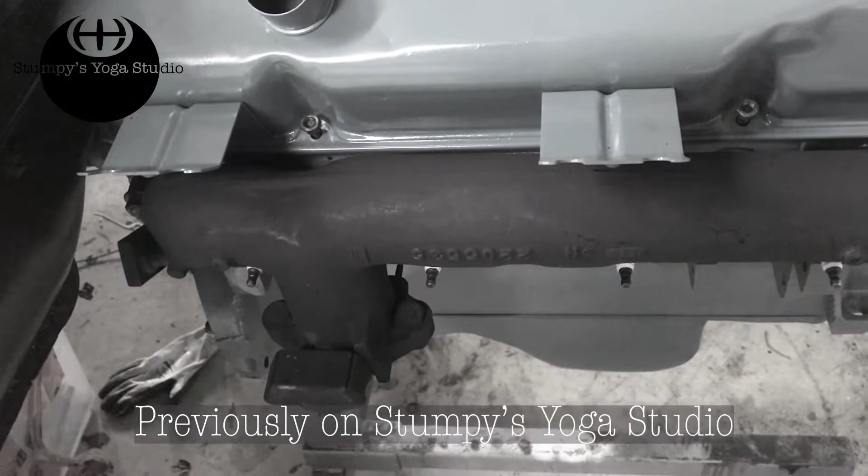I don't know what I gotta do here. These grommets go in here for the spark plug wires, but they're rather expensive online. One thing I'm doing is maybe making them on a 3D printer. Problem with that is I don't own a 3D printer, so that could slow that down.

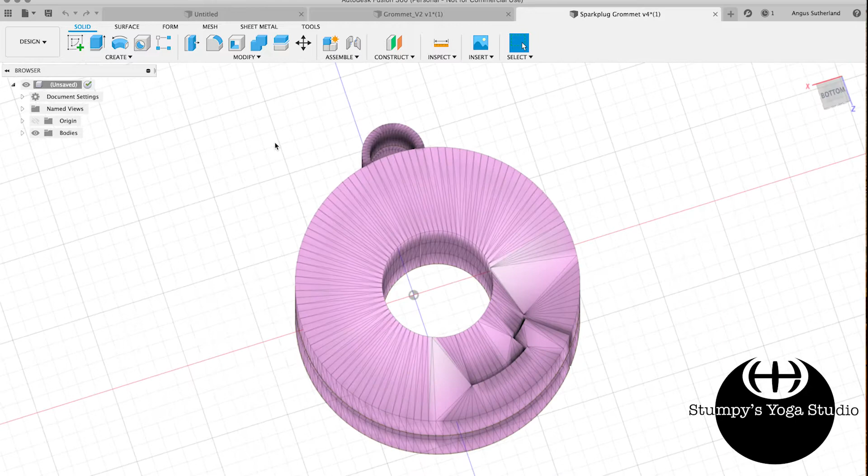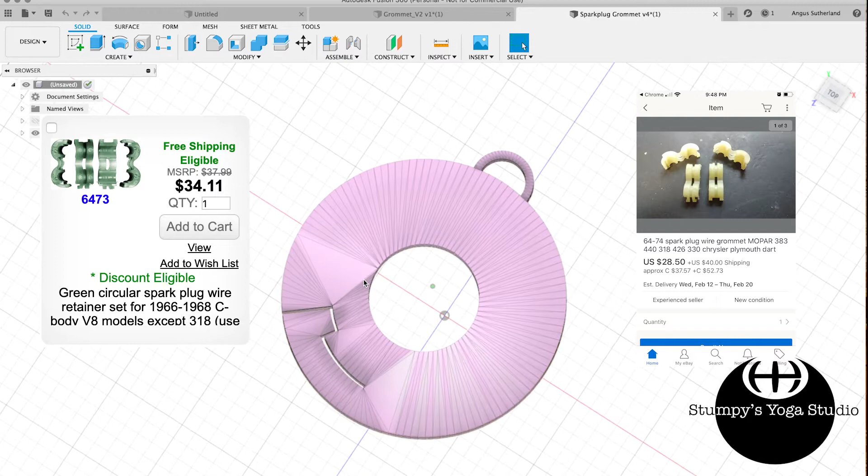I found the grommets this car will require. A couple places carried them, year one, and there's a seller on eBay, but the prices for them are just ridiculous. I was dealing between $8 and $20 a grommet, and I needed 8 of these, so I wasn't too enthused to spend that kind of money. It was going to cost like $180 Canadian to get them up here, and with that price point, I figured there's no harm in trying to create my own.

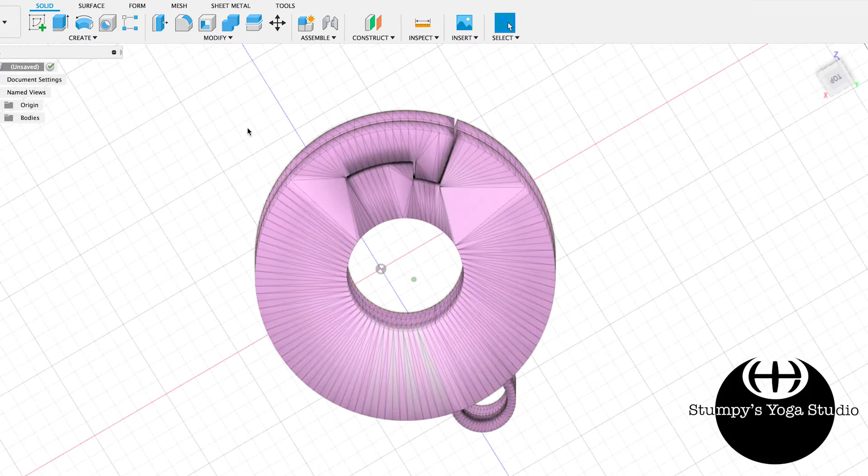So with a free hobbyist license with Fusion 360, I watched a couple of YouTube videos from this guy named Lars, and basically came up with the first iteration while watching the Super Bowl a couple weeks ago. Then I got in contact with a guy in Calgary who does 3D printing for hire, and for $60 he printed me a bunch of prototypes, and from those prototypes I could refine my design and came up with a more simple version of what I created.

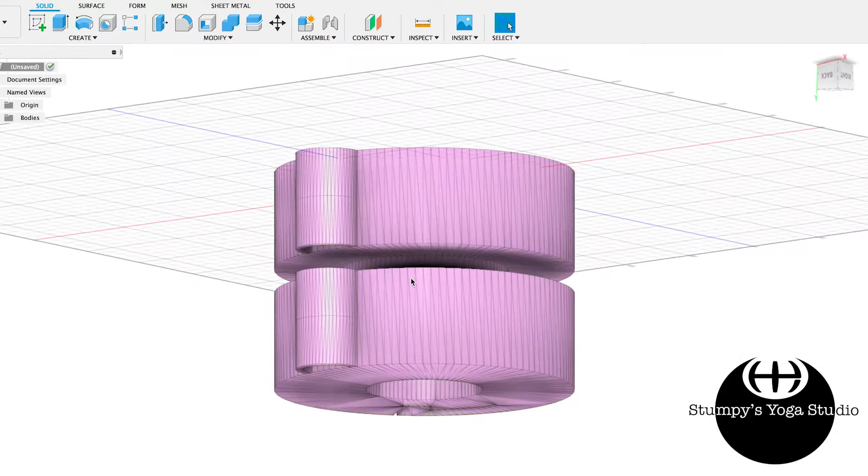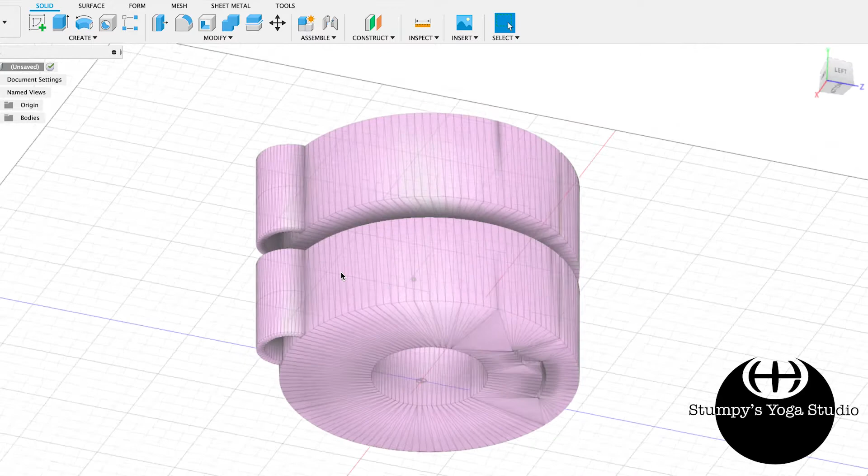My first version was going to latch on itself and close like the original ones did, but an active hinge in Fusion 360 is not something that's immediately easy to create for a newbie. So also the tolerances - having the print with the latch closed, there's not enough tolerance between the latch and the edges to print them separately, because the tolerance he was dealing with on his printer was about 0.4 of a millimeter. I'm not sure if that's true of every printer, but in this case, it was more than we could deal with.

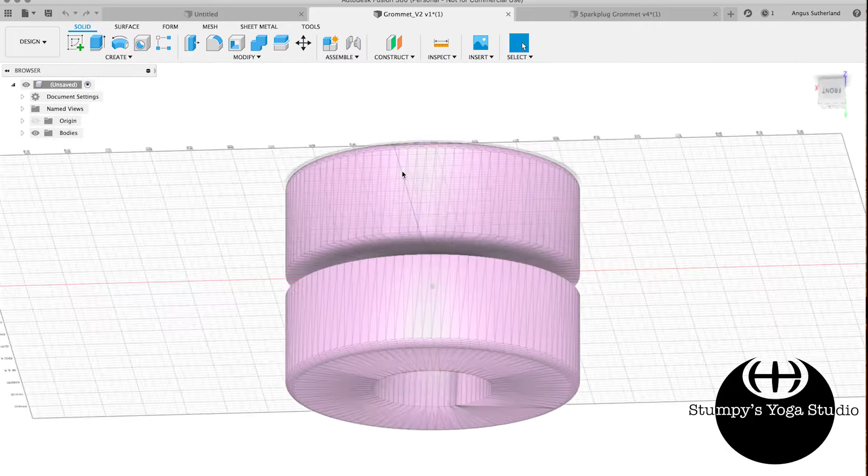So I basically did a second prototype and simplified it without a latch, just a round grommet that I could put on there. The upside to this - well, the only reason I could do this is because I was assembling my spark plug wires the same night. So being that I could route the spark plug wires through the grommet and then crimp the end with a boot, that's how I could make this work.

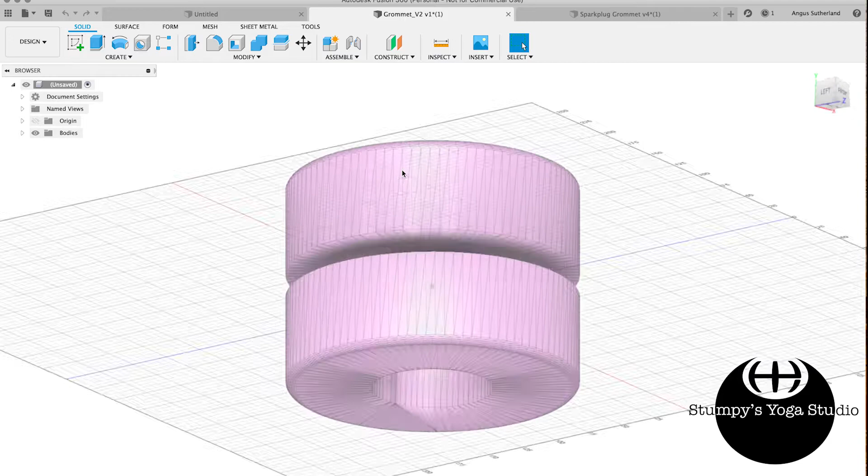Now, this is going to be a problem if I have to replace spark plug wires - I'm going to have to pull them apart. But for my first iteration, version 1, I'm pretty happy with the way this turned out.

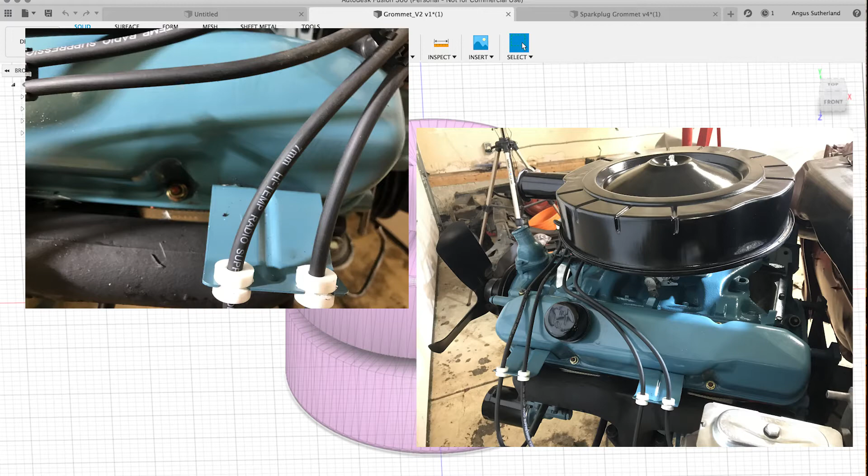I'd like to do a different print down the road. I'd also like to get my own 3D printer, so I'm not listening to somebody else tell me what I can and cannot do. I'd rather not be on the hook for paying somebody else to print these off for me, and develop my own knowledge in this space.

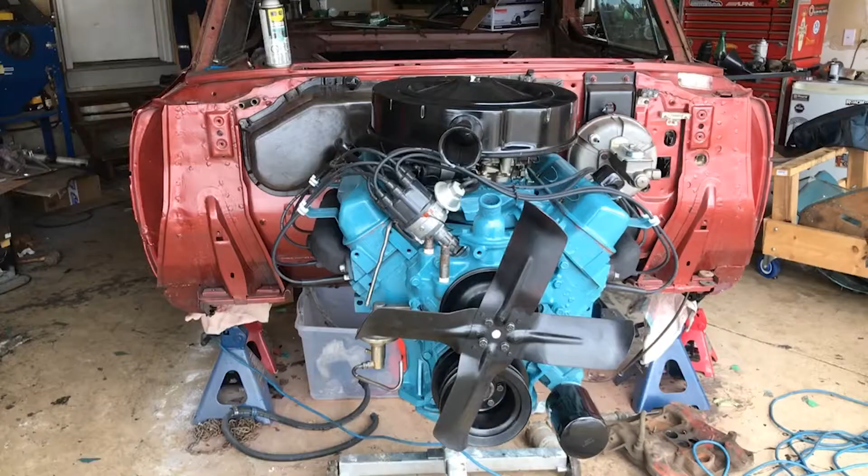But I'm at a third of what I was looking at to buy from other places. I'm ahead of the game, and I've shared these with a few other people, and they're available in a workspace for the price. I'm pretty happy with these, and they look excellent on the car. The original ones would be kind of tinted green, I guess - these are just plain white. But yeah, this turned out very well. I'm pretty happy with that.